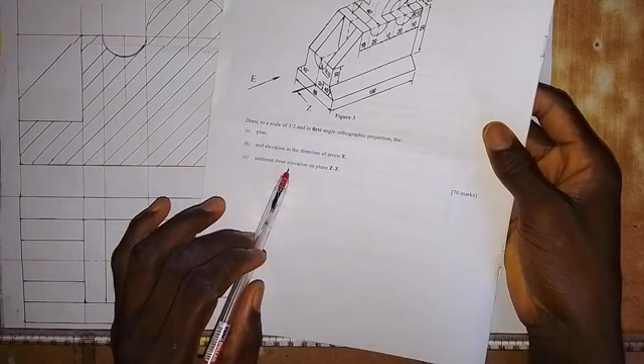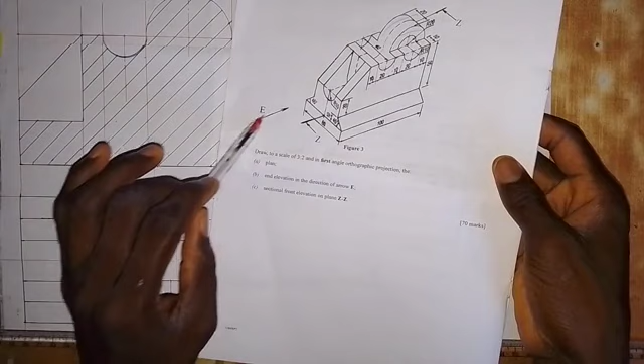We have worked on the plan, which is what we see here, and we have also worked on sectional front elevation on plane ZZ, which is what we have here. Now we want to work on question B, which is end elevation in direction of arrow E.

That means we are looking at the object in this direction, and whatever we see around here is what we are to produce as the end elevation in direction of arrow E. So let's start. We have drawn the plan and we have drawn the front elevation.

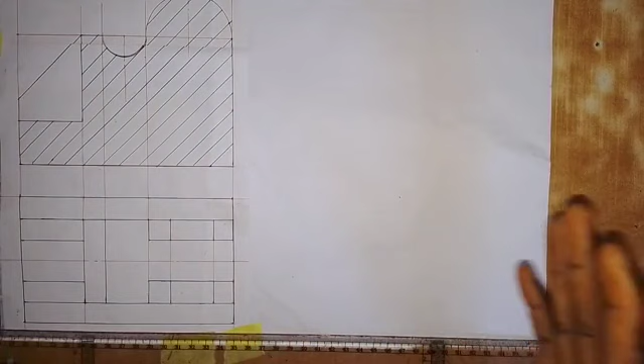So what we need to do, I'm going to show you. First, we take our 45 degree set square, setting it at this point on the front elevation, and through that we draw a line at an angle of 45 degrees to the horizontal.

I should have drawn a horizontal line here. So from here I will draw a horizontal line, like this.

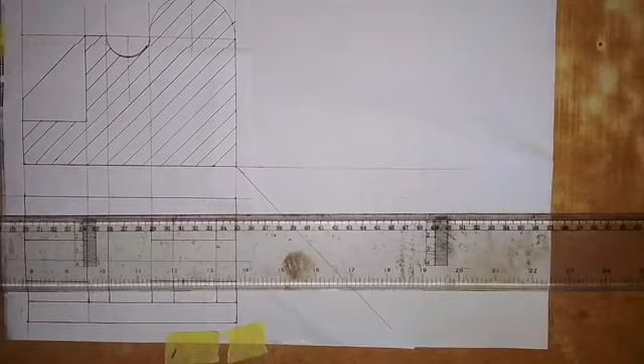The next thing I'm going to do is draw a horizontal line from the plan. Don't forget this drawing involves the use of the scale given to us, which is 3:2. That's the scale we've made use of here in the plan and also in the front elevation.

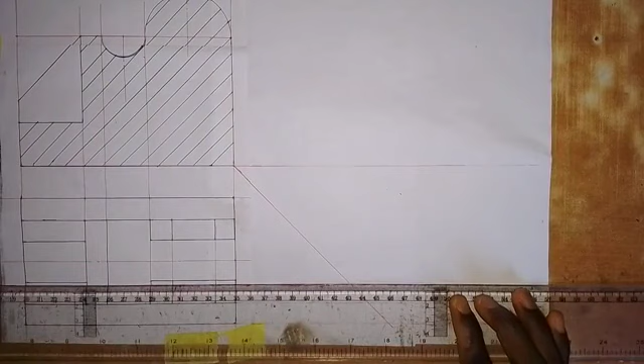We may not need to make use of that particular scale here for the end elevation, but let's see how it's going to be. Just follow me. From this point we draw a horizontal line, and from this point also we draw a horizontal line from this point in the plan.

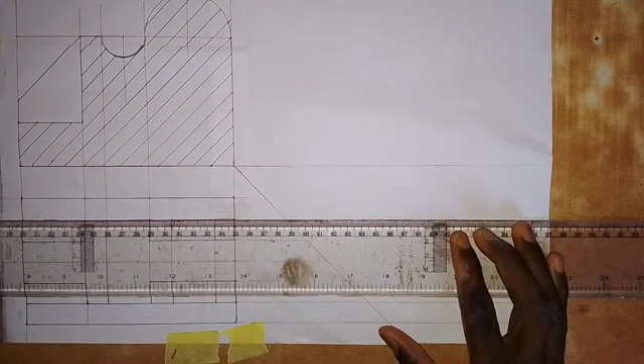We draw a horizontal line to meet this inclined line, and also from the center line we draw a horizontal line like this, and from this point we also draw a horizontal line. So with all the horizontal lines we have drawn here, each of them touches this inclined line.

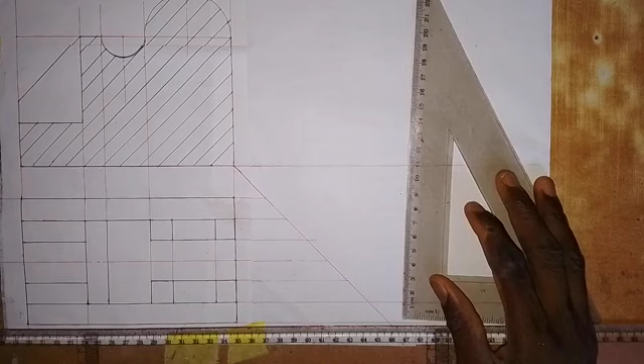So what we need to do now is take our set square and draw a vertical line from each of these points, where the horizontal line touches the inclined line. So here we draw a vertical line.

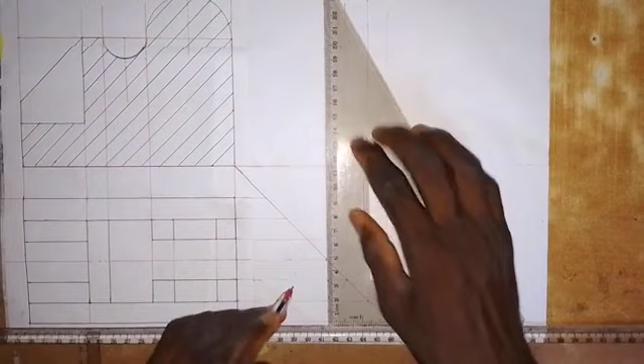We are placing the end elevation here. So from here we also draw a vertical line, and here also we draw a vertical line. Then here we draw a vertical line, and here we also draw a vertical line. Then here we draw a vertical line, and here we also draw a vertical line.

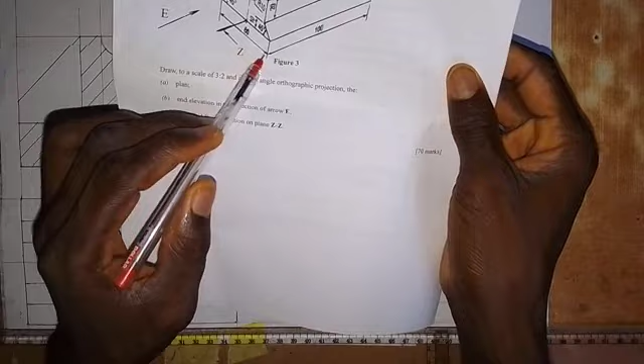Now we don't have to worry about the distance from here to here for the end elevation, because as we are told the scale is 3:2, which we have made use of to get the distance from here to here. So that distance is now equal to the distance from here to here, and we don't have to take that distance again.

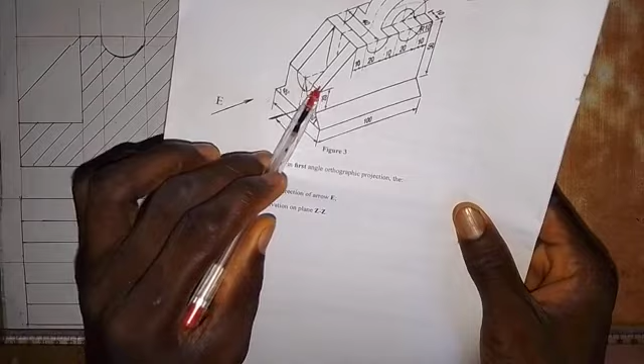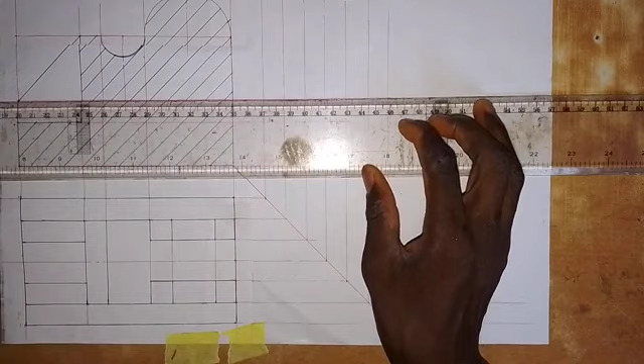So what we need to do now, since everything we need is already in the plan and the front elevation, is to draw a horizontal line from this point, and from this point also we draw a horizontal line, here in the front elevation.

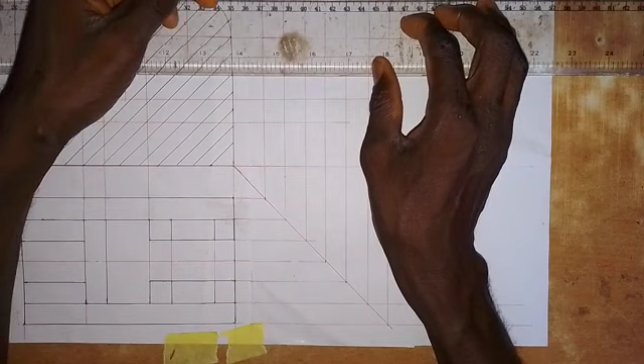Here we draw a horizontal line. Also from this point we draw a horizontal line, and then from here also we draw a horizontal line. Then at this point we draw a horizontal line.

Alright, so our work is very quick now. What we need to do now is bring out the shape of the end elevation by looking at the object given to us.

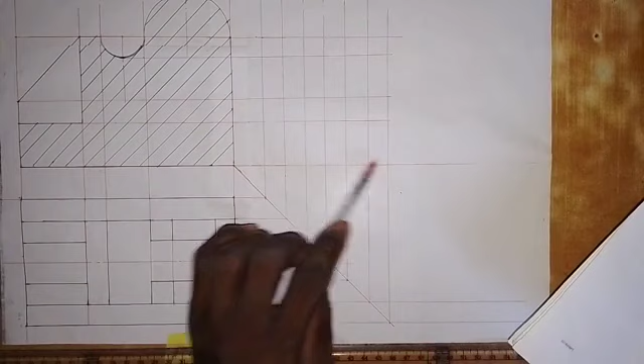Now the distance from here to here, as I said, is the distance from here to here, so it's going to be a thick line. Let's do that at once so it doesn't take us time. So we make this line a thick line, like this.

So make this line a thick line like this. Then another thing we have here, because in the end elevation we have to show this particular part, we have to show this shape as we have it here, which is not in the sectional front elevation.

This is the sectional front elevation, not actually the front elevation. The sectional front elevation, even for the front elevation, is going to be like this, except that we will not hash this surface, and we also need to put some things here in the front if it is a normal front elevation.

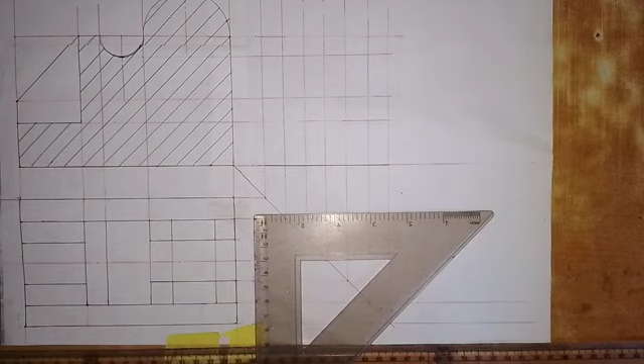Now, what we need to do is bring out this shape as given here. This line is at an angle of 45 degrees to the horizontal, and the distance from this point to this line is 10 millimeters. If we multiply 10 millimeters by 3/2, that gives us 15.

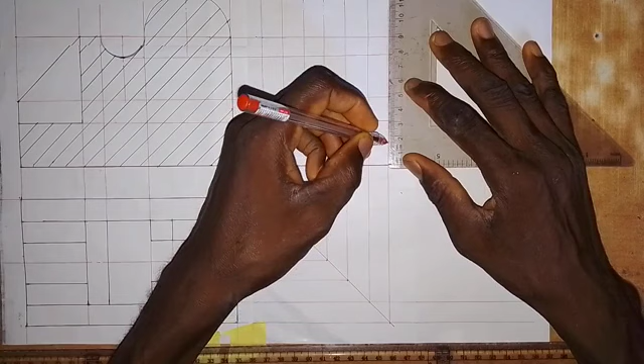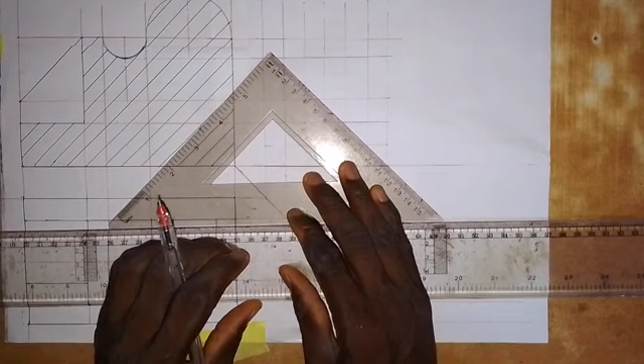So we just need to take a measurement of 15 millimeters up. This is 15 millimeters, and we are going to transfer it to this side. We draw the line just to get it at this point. Then with our 45 degree set square, we set our 45 degree set square.

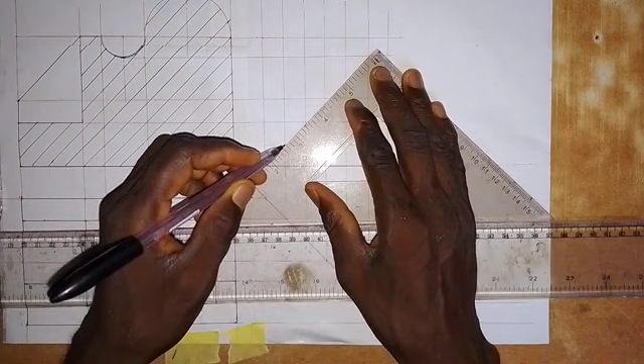So at this point we are going to draw a line from here. It goes like this, and also on this side it also goes like this. So we have the shape as given, this is the shape that we are talking about.

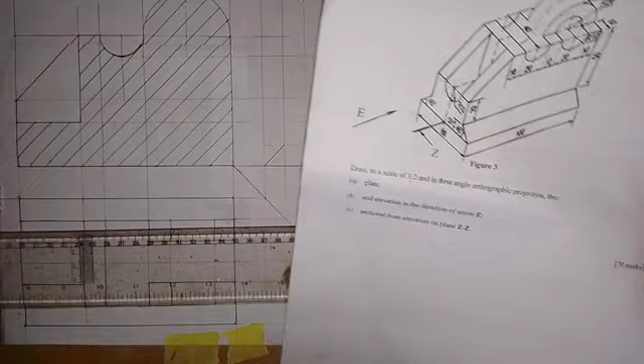So going up here, we need to locate this point where we have this line and this line apart from this. So we also put that there. Let's get this point and this point. Where do we have it? It is here.

So we have the line, but we need to draw a vertical line to this point, from here to here, and this line from here to here. So we need to draw them and make them thick lines.

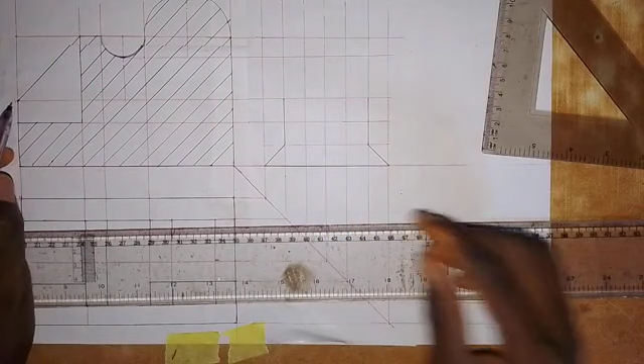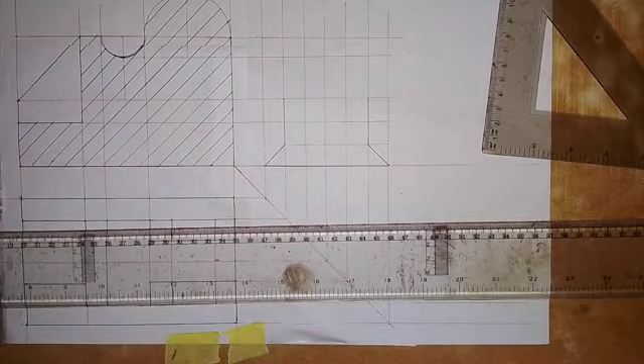Then for this curve that we have here, this semicircle, the distance starts from here to here. We need to bring it out right now. If you follow this line here, that is where we have it, so we need to bring it out.

I will take this distance from this point, which is the radius, and put it at this point here, then I will draw like this. Don't worry about the lines, you just need to bring out the shape. The shape is what we are focusing on.

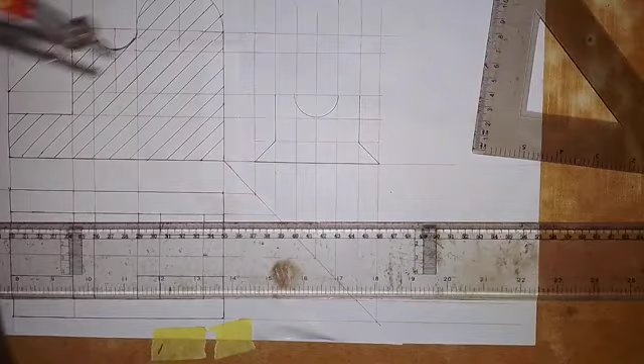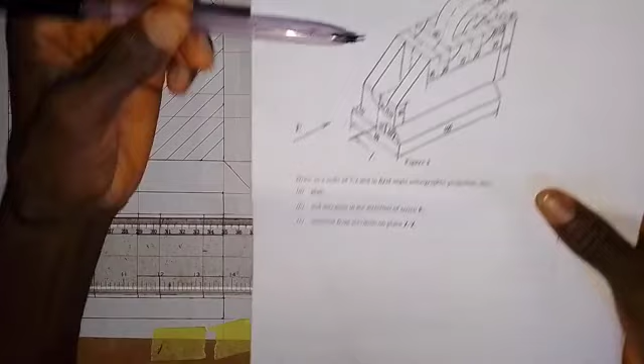Then this line here and this line here, we have to bring them out. So this is where we have the lines. We make this a thick line, and we also make this a thick line from here to here. So we are working on the shape now.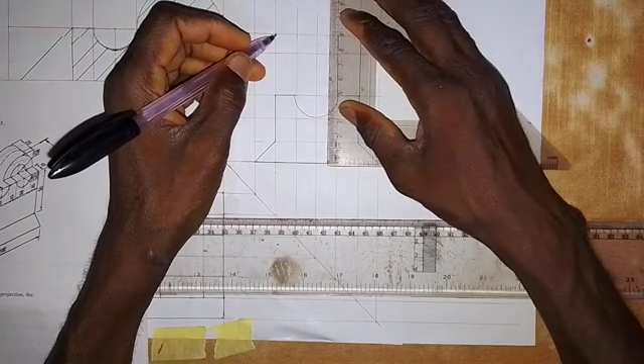So this rectangle here and this rectangle here, we are going to have them along this line, from here to here, and this. We have this too, so we just need to make this a thick line like this. Then this is also a thick line.

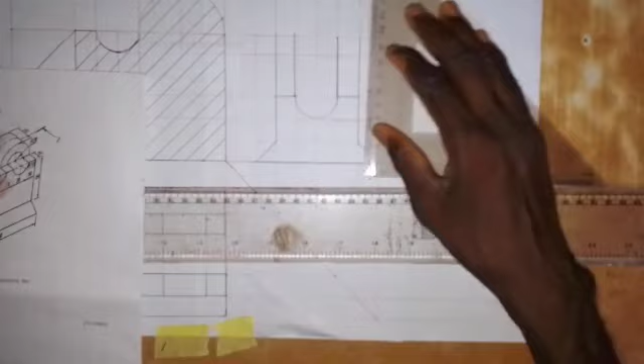So then we make this a thick line, and also make this a thick line like this.

On the upper part here, we have this line going like this, so we need to draw it from here to here. We draw the line. So the shape is coming out little by little, and we are moving on.

What we have left here is that at this point there is a line on this curve that is not going to be seen, and that is along this line that we drew here. So we need to make this a short dashes line from this point.

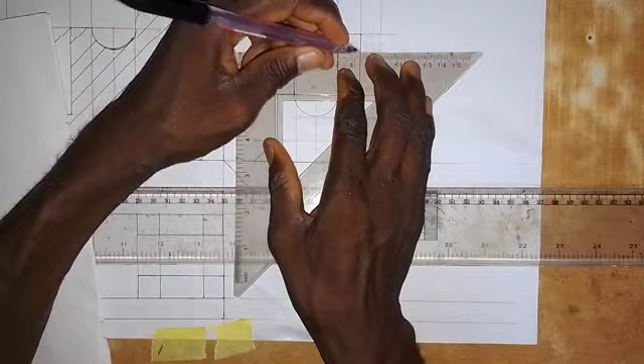So we have this. Next, this part that we have here is going to give us just a rectangle or a square, I don't know how it's going to be. So where do we have it?

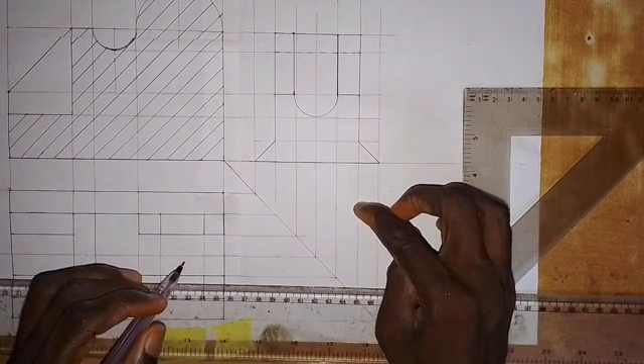We have it along this line like this, and also along this line. So it's along this particular line. We just draw it like this, and also draw it like this. They have the same dimension, so we also make this line a thick line like this.

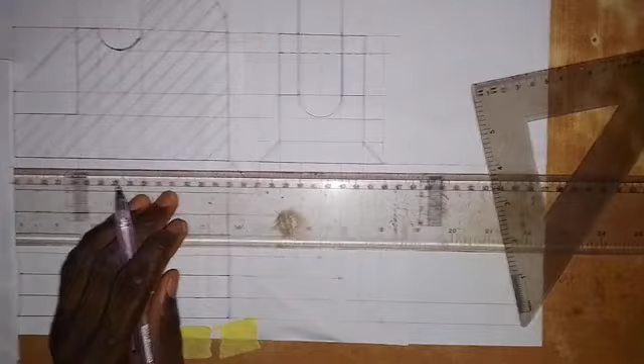So this is how the end elevation will look, as simple as I've done it here. All you need to do is practice. When you practice, you become a master at it. Thank you, and God bless you.